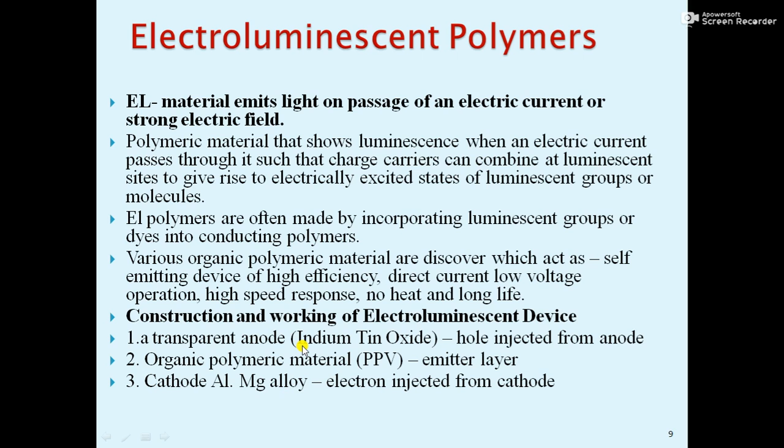Now we will see the construction and working of the electroluminescent polymer. As you can see, this is an organic electroluminescent device. A typical polymer LED is composed of a layer of electroluminescent polymer like PPV, polyparaphenylene vinylene, situated between two electrodes. The transparent anode is ITO, indium tin oxide, and the cathode is made up of aluminum, calcium, magnesium, all deposited on a glass or polymer substrate.

So this is the structure. This is how we make the arrangement of the cathode, anode and electroluminescent polymer layer on the substrate. Now how it works: an applied electric field leads to the injection of holes, meaning positive charge, the majority charge carrier, and electrons from the cathodic side into the light emitting polymer film from the two electrode contacts. The holes come from this side and the electrons come from that side.

So now what happens? The electrons injected from the cathode and the holes from the anode move towards the polymer over a certain distance, and recombination of these charge carriers takes place. It results in luminescence during return of the excited emitter to the ground state. The band gap determines the wavelength and the color of the light. What color of light will there be? It depends on the wavelength and the band gap.

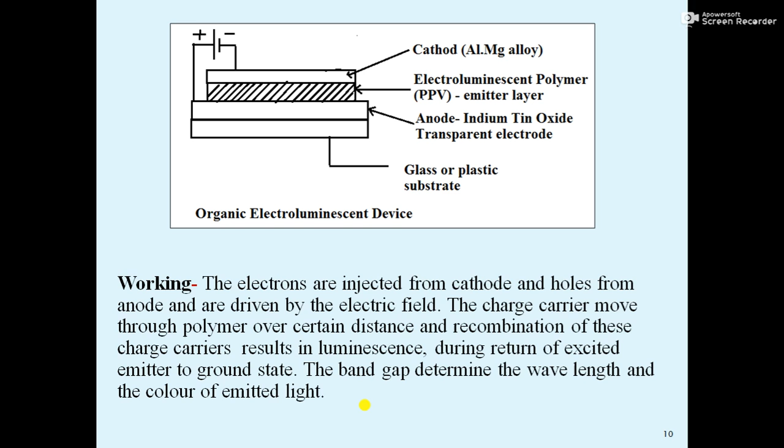An example of electroluminescent polymer is PPV, polyparaphenylene vinylene. This is the structure of PPV. It is a conducting polymer. It can be easily processed into highly ordered crystalline film. PPV is easily synthesized, has good purity, high molecular weight, and it is insoluble in water, but its precursor can be manipulated in aqueous solution.

It has good purity, high molecular weight, small optical band gap, and its bright yellow-green fluorescence makes PPV useful in LEDs. So PPV is a conducting polymer with a conjugated pi electron system. As you can see in the picture, this is the structure of PPV. What are the important properties?

PPV is a diamagnetic material. It has low intrinsic electrical conductivity, electrical conductivity increases on doping, and with ease of oxidation it has much higher conductivity. It is insoluble in water and it gives bright yellow-green fluorescence on application of an electric field. PPV is capable of electroluminescence due to its stability, processability, and electrical as well as optical properties. PPV is used in organic light emitting diodes, OLED.

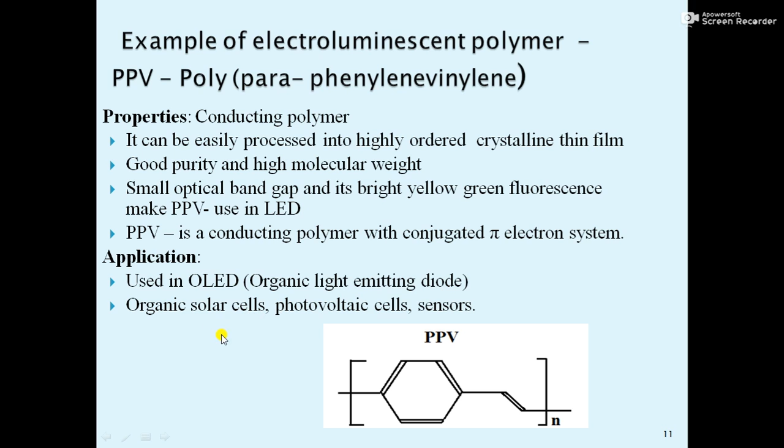Devices based on PPV as the emissive layer emit bright yellow-green fluorescent light, and derivatives of PPV are used when light of a different color is required. PPV is also used in organic solar cells, photovoltaic cells, and sensors. In these devices it can be used.

Now let's discuss polymer composites. In modern technology, there is a high demand for structural materials with unusual combinations of properties such as low density, high strength, and high abrasion and corrosion resistance, for applications such as high temperature reactors, aircraft, missiles, and gas turbines. In order to meet these demands, a new class of material called composites has been developed.

Composites are formed by the combination of two or more different materials, with properties of the resultant material superior to those of the individual materials. The components of a composite do not dissolve or merge completely into each other, but act together retaining their individual identities. Polymer composites are one of them. A polymer composite is made up of a polymer matrix and reinforcing materials put together with a defined interface.

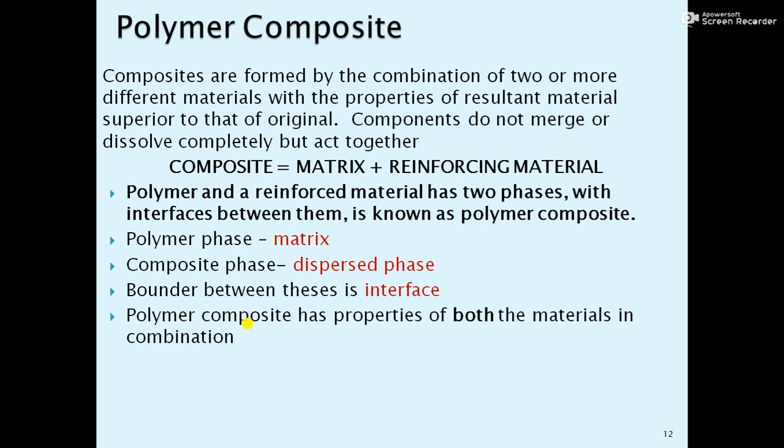The polymer phase is called the matrix, the composite phase is called the dispersed phase, and the boundary between these is called the interface. A polymer composite has properties of both materials being combined: the property of the matrix as well as the property of the reinforcing material. As the polymer composite is made up of matrix and reinforcement material, first we will discuss the polymer matrix phase.

The function of the matrix is to bind the reinforcing particles or fibers strongly. It acts as a medium for distribution of applied load to the dispersed phase. It keeps the reinforcing fiber in the proper orientation and prevents the propagation of cracks due to its plasticity. The polymer matrix is the continuous body constituent surrounding the other phase and gives a bulk form to the composite.

Now what matrix can be used? Two types of polymer matrix can be used, thermoplastic and thermosetting.

Thermoplastics are the ones which can be made soft on heating, hard on cooling. Thermoplastic composites can be prefabricated into a semi-finished item and later can be converted into the final shape.

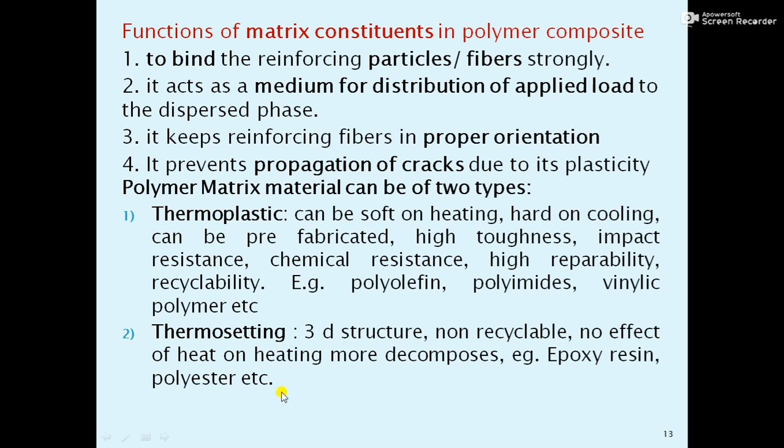Thermosetting polymers are used as matrix material, like epoxy resins, phenolic resins, polyester. These are used as thermosetting polymers.

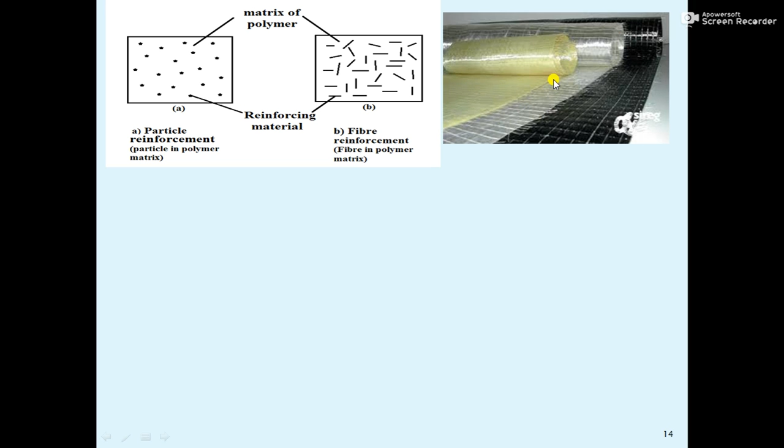Now next, as we know, the disperse phase, reinforcement materials, these can be used in two forms: in the form of fiber, and in the form of particulate. These are the particle form, these are the fiber form. In the picture you can see this is the polymer matrix, which is actually composite polymer. So it's having the fiber, or sometimes it can be used with the help of particle reinforcement. So these are the polymer composites.

Classification of composites is based on the reinforcement material: particle reinforced, fiber reinforced, structural reinforced. Particle reinforced can again be large particle and dispersion strengthened. Fiber may be continuous or discontinuous, discontinuous aligned and randomly oriented. Structures: laminates and sandwich panels.

So one by one we are going to discuss. Particle reinforced composites, particulate composites, are composed of particles distributed or embedded in the matrix body. Metallic or non-metallic particles can be added to the polymer matrix, like carbon black. These can be added. Concrete, wood particles, these can be added for particle reinforced composites.

Now fiber reinforced composites are composed of fibers embedded into the matrix. These can be further divided into three categories: continuous aligned, discontinuous aligned, and discontinuously randomly aligned. So in this way these can be of three types. Continuous, as you can see in the picture, this is continuous aligned composite, discontinuous aligned, and discontinuously randomly aligned.

Now the third type of composite is structural composite. The properties of structural composite depend not only on the constituent material but also on the geometrical design. It is of two kinds: laminar and sandwich. Laminar composite is made of lamellar sheets that give the strength, having high strength in a particular direction, such as in wood or in continuous aligned fiber reinforced plastic.

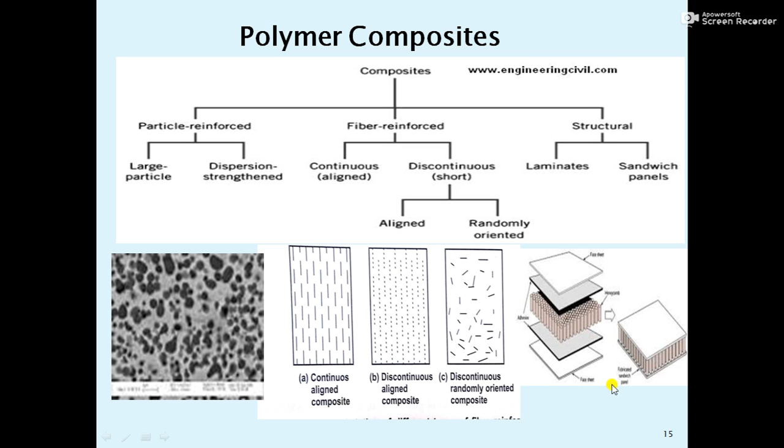In a sandwich panel, it consists of two strong outer faces separated by a layer of less dense core. Face material is generally fiber reinforced plastic, whereas the core material can be synthetic rubber or foamed polymer. These types of materials are normally used in aircraft wings, boat hulls, roofs, floors, and walls.

Now what are the properties of composites? These have high tensile strength, high stiffness, low coefficient of expansion, high heat stability, better abrasion and wear resistance, and high toughness, high impact strength.

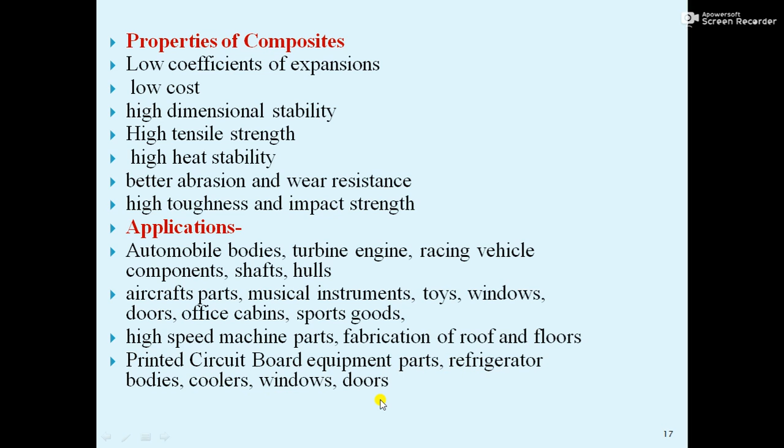Due to these properties, the applications are: automobile bodies, turbine engines, racing vehicle components, aircraft parts, musical instruments, toys, windows, speed machine parts, fabrication of roofs and floors, printed circuit board equipment parts, refrigerator bodies, coolers, windows, doors. All these can be made from composites.

Now, polymer composite FRP means fiber reinforced plastic. Fiber reinforced plastic is a composite material made up of polymer matrix reinforced with fiber. The characteristic properties of FRP depend on the nature, orientation, and distribution of fiber, the nature of the polymer matrix, and strength. General properties are high tensile strength, stiffness, elastic modulus, and lower density.

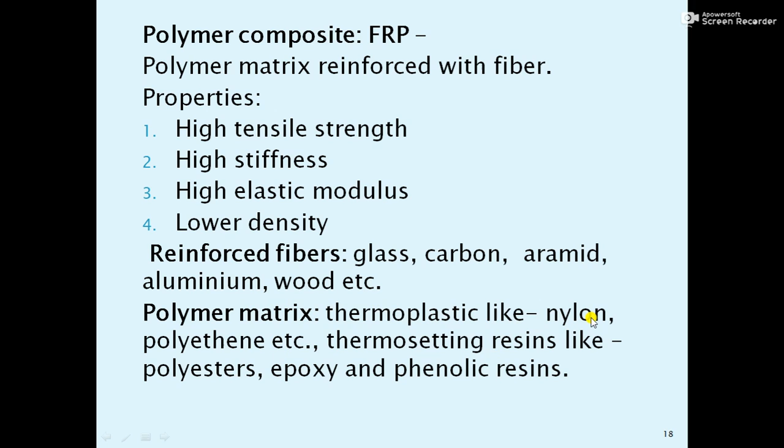So reinforced fibers are glass, carbon, aramid, aluminium, wood. These can be used. And the polymer matrix for thermoplastic includes nylon, polythene. In thermosetting, polyester, epoxy, phenolic resins can be used.

Now FRP are mainly of two types: glass FRP and carbon FRP. Glass FRP matrix is polyester or nylon. Properties include high tensile strength, impact, corrosion, and high chemical resistance. Limitation: the polymer material can deteriorate at high temperature, so there is a limited temperature range, and it does not possess stiffness and rigidity, so it cannot be used for structural components. It is used for automobile parts, storage tanks, and plastic pipes.

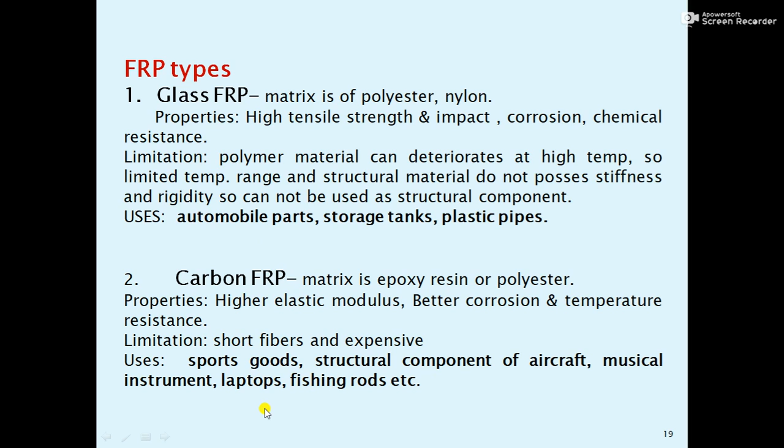In carbon FRP, the matrix is epoxy resin or polyester. Properties: high elastic modulus, better corrosion and temperature resistance. Limitation: short fiber and expensive. That's why it can be used for sports goods, structural components, aircraft, musical instruments, laptops, fishing rods, etc.